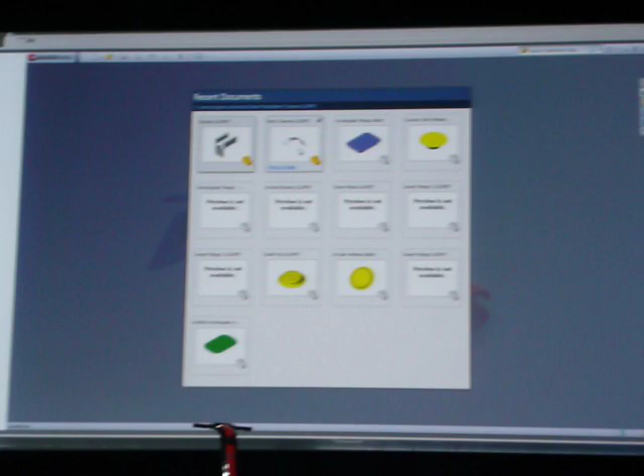Open the folder from where that file is located. Isn't that easy? Come on. Fantastic. It's also available right from the file menu as well.

But that's just the tip of the iceberg with this fella. What's with all these crazy decimal dimensions on this part that we have here? Well, that's because we use millimeters, but our customers use inches. I'm always going into document properties to change the units.

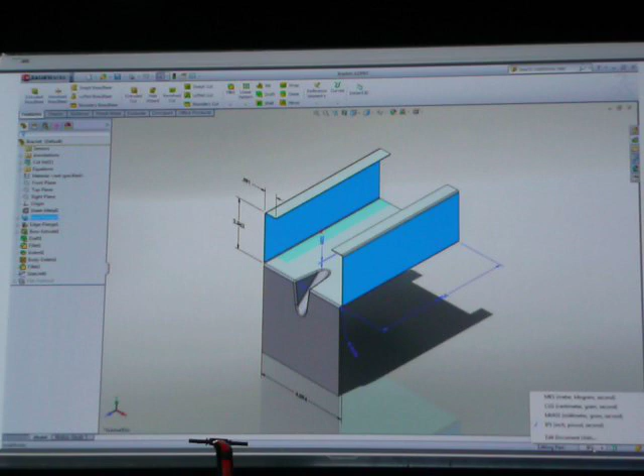So I usually just leave it. You time waster! Why don't you just use the unit switcher in the status bar to change it on the fly? Well, let's get to the real crime here.

Sheet metal. That really gets me bent out of shape. Right, Hatch. You're wasting a lot of time with workarounds trying to figure out things like this up-to-vertex flange. When you start changing the angle, the length of the flange keeps changing. Now you can just choose parallel to base flange and get the exact result you're after.

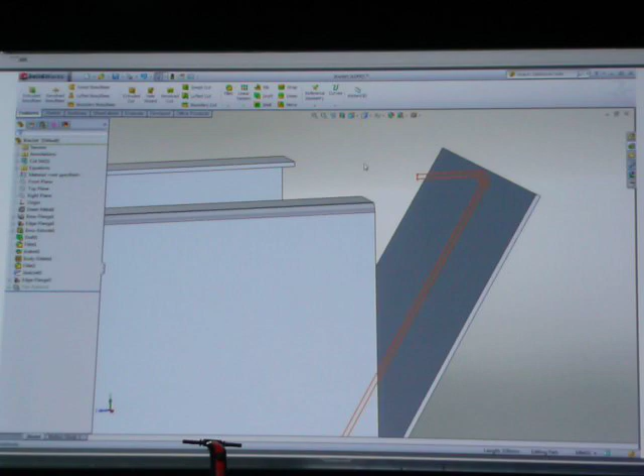Or how about figuring out the length of the flange at an angle from the outside of the bend? You can now reference the outside tangency to ensure that you have the right length flange. So now when it comes time to close those corners, you can get the right size and shape of your part.

You're bending the truth. I'm innocent. I don't think so, Cookie.

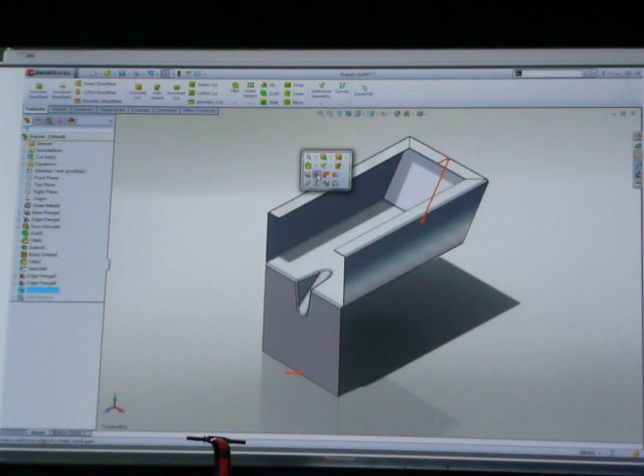Let's take a look at another example where you're trying to control flange length and position. For example, when you have an angled flange and you want to maintain tangency to the end of the part, just like before, as you start changing the angle, existing options don't give you exactly what you're after. But with tangent flange position, you have accurate control.

Combine this with tangent bend length, and you have more control over your flanges and your questionable driving habits.

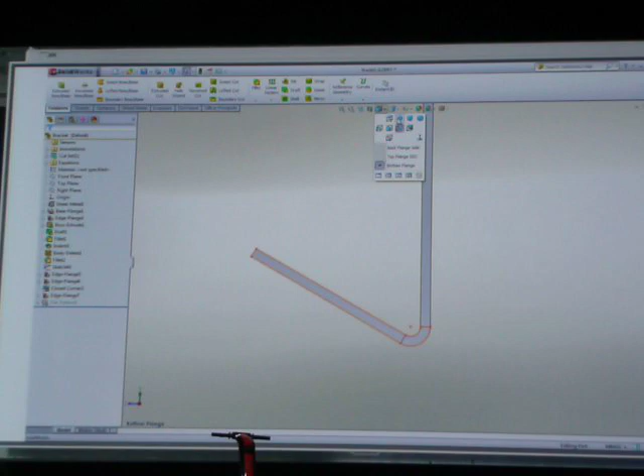And no more wasting time on trying to add form features either. It's easy now to place them on the part and locate those form tools. Now with the property manager, you can even dynamically rotate, flip, and even utilize configurations. There's no guesswork involved anymore.

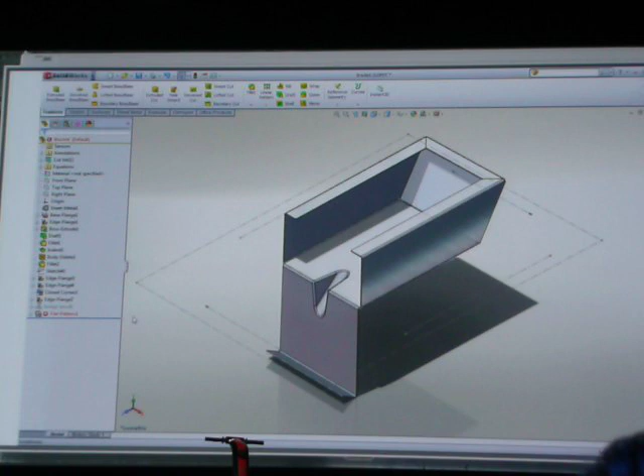It doesn't matter anyway. I can't unfold this part because of the corner reinforcement. Well, if you were using 2012, you know that you can now select faces to ignore when unfolding a sheet metal part. This means that you should never have any problem unfolding any of your components.

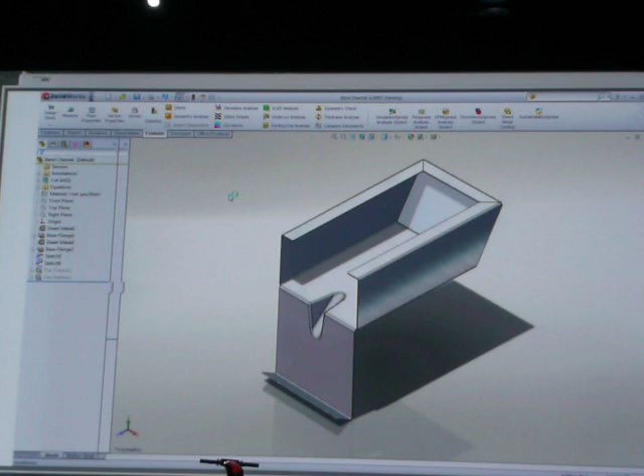If you'd use the command search, you'd see how easy it is to find any tool. Just start typing the name and a list of possible tools is presented. Once you're creating the sweep flange in sheet metal, it's just like any other sweep profile. Pick the profile and the path, and that's it. There's no faking flat patterns anymore, and it unfolds easily.

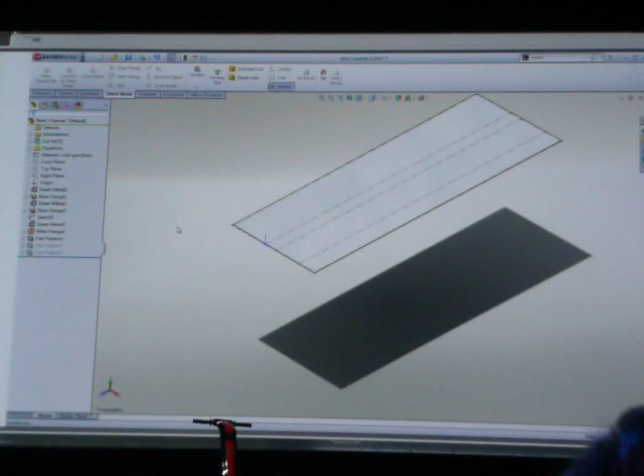Yeah, I think we're forming a strong case here. Yeah, whatever. Is that all you have on me? No, not by a long shot.

I know how much time you've been wasting placing diameter dimensions in your sketches. If you were using SolidWorks 2012, you could have just placed one diameter dimension, and the dimension tool would automatically lock in a double dimension mode, saving you a lot of wasted picks and clicks.

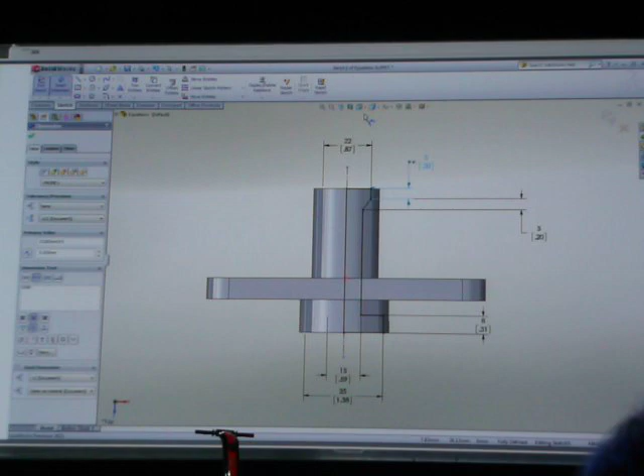What? No way. Yeah, well, you should also be using the new equation editor in SolidWorks 2012. Now with a single dialog box and an automatic solve order, which we'll enable in a little bit, it has new things like category view, dimension view, and ordered view.

You'll notice that when we turn automatic solve order on, we don't have to worry about the order we created our equations in anymore. And adding equations is fluid and dynamic now.

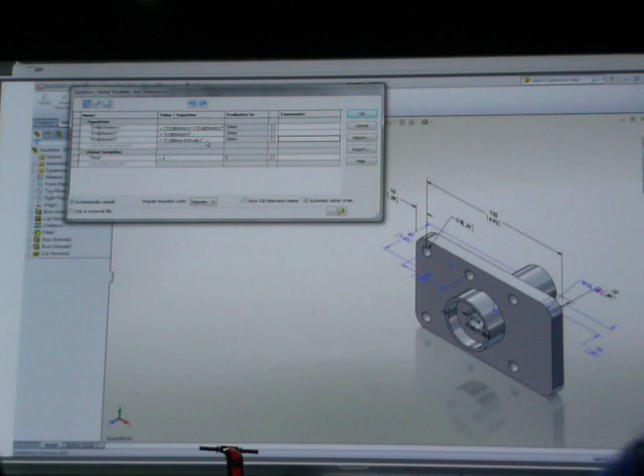Let's start simple by making one dimension, watch it, equal to another. Notice the color highlighting makes it easy to tell whether you've got the right or wrong syntax.

That's right, Hatch, but you also now have a drop-down that makes it easy to utilize information in the model, such as file properties, functions, and global variables. Also, automatic rebuild reflects those changes instantly, giving us dynamic feedback.

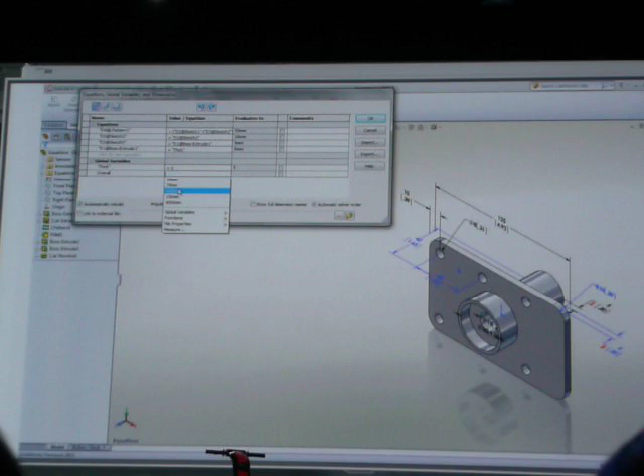And like equations, we can add global variables and access a list of recently used values, reducing wasted time and typos. We can immediately use those variables in our equations.

Sometimes we want more than that in model dimensions. So we can now add those to our equations and utilize the measure tool from the pull-down. This creates a reference dimension on the fly, and that means the equations stay parametric, giving us more control and flexibility over our design.

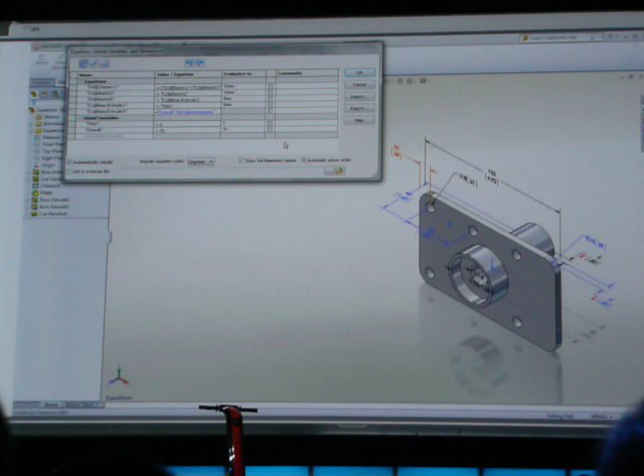You can also drive these global variables with an equation of their own, adding more depth to the design. Finally, as always, we can create complex equations, utilizing multiple values inside of the model to solve complex problems with simple solutions, such as the hole spacing on this part.

Well, to be fair, you created those equations in the wrong order, but SolidWorks 2012 took care of that for you with its powerful automatic solve order.

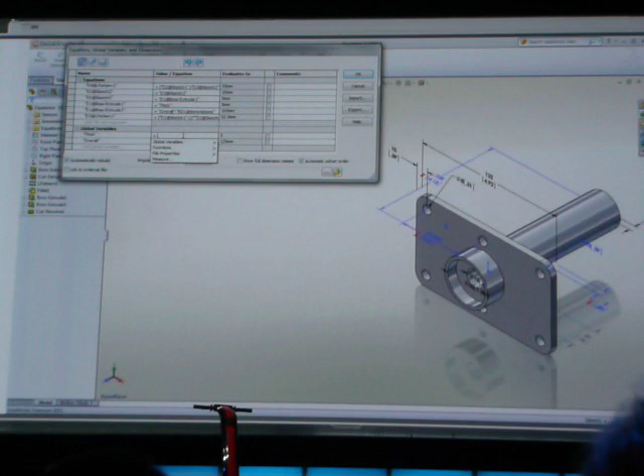Well, I hope I can change my ways as easily as correcting these equations in SolidWorks. Well, rehabilitation doesn't come with an automatic rebuild, Cookie.